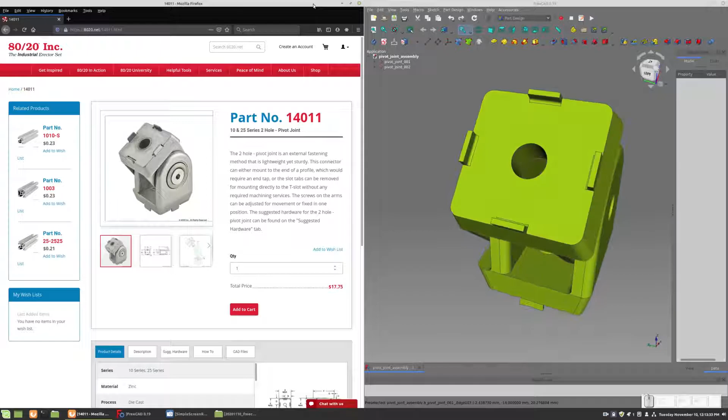Today we're going to model a pivot joint, a two-hole pivot joint. It's part number 14011 on 8020.net. We're going to model most of it. I won't model the bearings, but other than that it'll be the same. I'll put a hole in the middle where you could just put a bolt through it. So stick around and we'll get right to it.

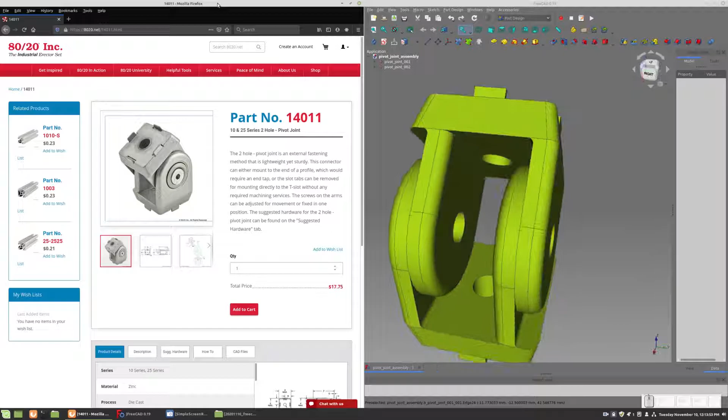Okay, before we can start modeling this pivot joint, we need to understand what it is we're modeling. If you go over to 8020.net, you'll find this blueprint for the part. The first thing I noticed is that this whole assembly is made up of two identical pieces. So we'll just be modeling the one, and then I'll show you how to use an assembly workbench to create the entire pivot joint.

The other thing to notice is that there's a lot of dimensions. If you go to the bottom of the page that has this blueprint, you'll see these dimensions listed in a table, and those will be helpful.

But one thing that's kind of jumped out at me is that there's things here that you don't really know. This blueprint doesn't tell you how tall this piece is. I'll call this the base, or the block. Just the base. It doesn't tell you the thickness of this base. It also doesn't tell you how much clearance is between the bottom of the base and the bottom of the arm - I'll call this the arm. So it doesn't tell you what this gap is.

So there are things that it doesn't tell you, and there's a lot of duplicate information too, like E and A are the same, and D and B are the same. So the blueprint might look complex or might look complete, but it really isn't.

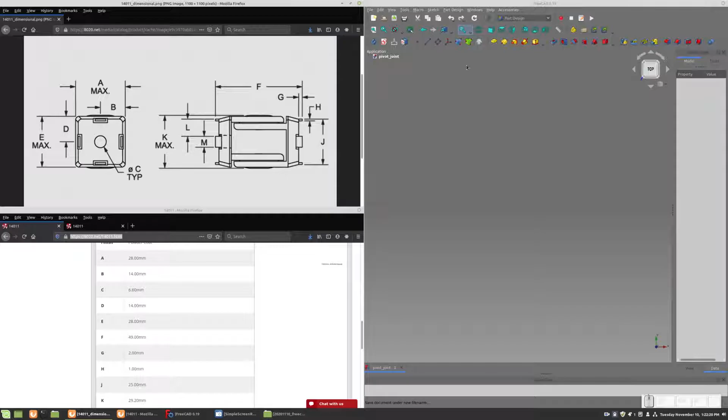Obviously this blueprint is not designed to help you design this thing from scratch to match the exact real thing. It's probably mostly there to give you a sense of whether you could actually use this pivot joint in whatever it is you're building. So we'll make some guesses and infer some values, but we'll come up with something that's pretty close to this. Go over to 8020.net, take a look at this information and the dimensions, get a good feel for what this thing looks like before you start modeling, so you can know what approach you're gonna take. With that, we'll fire up FreeCAD here and start creating this thing.

I'm going to start by modeling what I'm calling the base - that's kind of this block thing here. I'm actually going to start by creating a spreadsheet to hold all the values, just in case we want to change it later. So we go to the spreadsheet workbench and create a new spreadsheet.

And then some of the values I'm going to need: looking from the outside of the hinge, the outside of the pivot joint to the inside, there's this narrower face of the base, which I'm going to call the outer face. And then there's the wider one, which I'm going to call the inner face. So we'll call this base outer face width and base inner face width. I know I'm going to need those two things.

These also have fillets on them, so I'm going to need fillet radius. These two look the same - the fillet radius on the outer face and the fillet radius on the inner face look to be the same to me. So I'm just going to call this the base fillet radius.

Okay, so I'm just going to guess 2 millimeters. The outer face width, which is the narrower one - let's see, that's J - so that's 25 millimeters. And the inner face width is A, which is 28 millimeters. Then we need to give these some aliases, and I'm also going to add the display units in here, so these are millimeters. We'll call this the base outer face width, and then same thing on here.

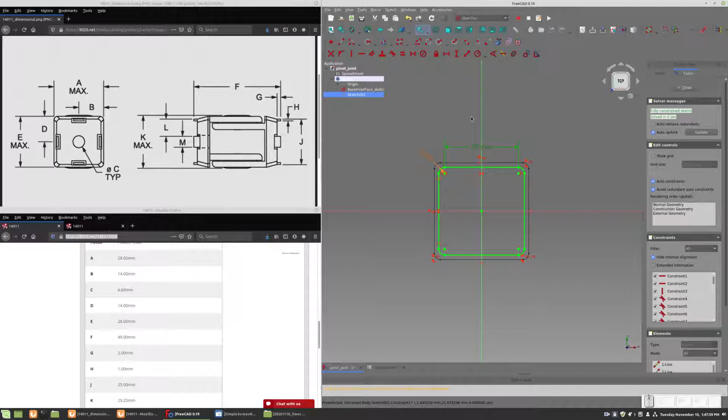Okay, so I've actually not done this quite correctly here. I've set this as 25 millimeters, but that's not correct. The width is actually of the whole thing. So let's delete that and do it here.

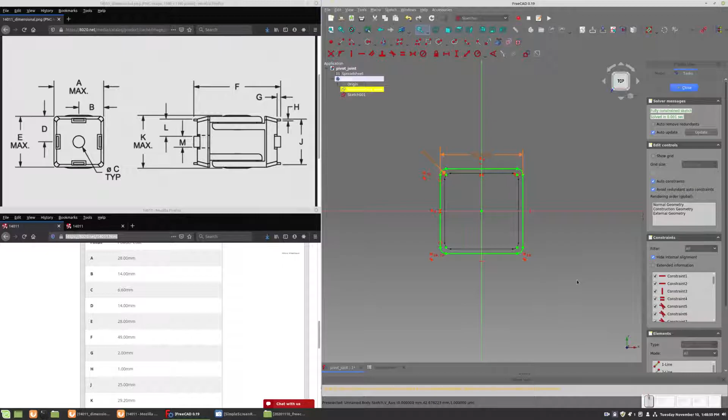And then we'll close that, and let's go back to this one because I've made the same mistake there. So let's delete that and then set the constraint on those 2 points. Okay, that's more like it. Let's rename this one. That's the base outer face sketch.

And then we need to move this up. What we're going for here is we're going to extrude from one sketch to the other. So we need to move this outer face out a little bit, or up a little bit. So I believe that's in the attachment. Yeah, attachment. All right, so I need to move that in the Z direction, the Z axis. But I don't know how much.

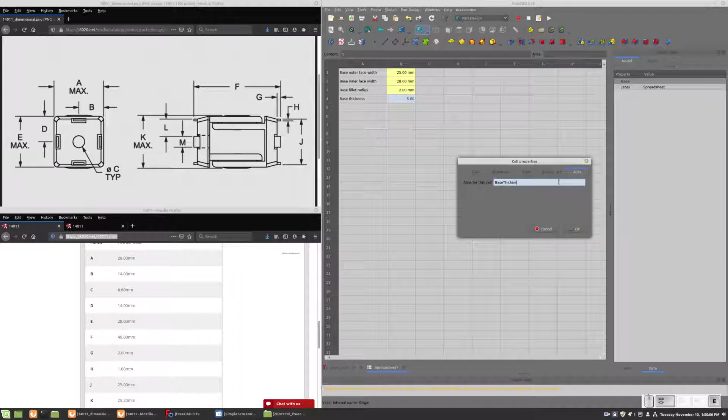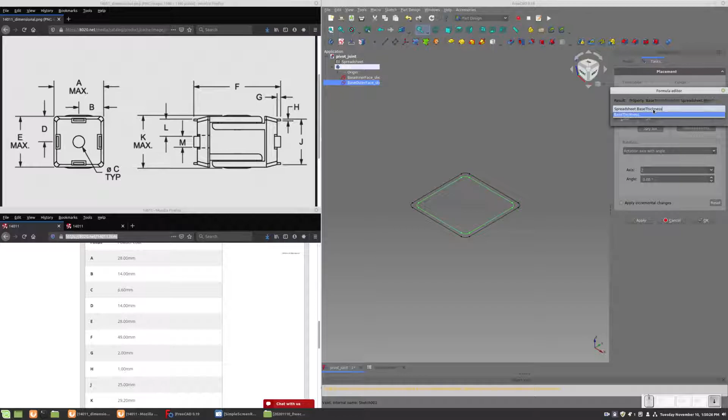Remember I said how this thickness is not defined. So I'm going to add an entry to the spreadsheet. I'll just call it base thickness. And I'm just going to make a guess for now, and then we can come back and revisit it. Okay, that seems reasonable for now.

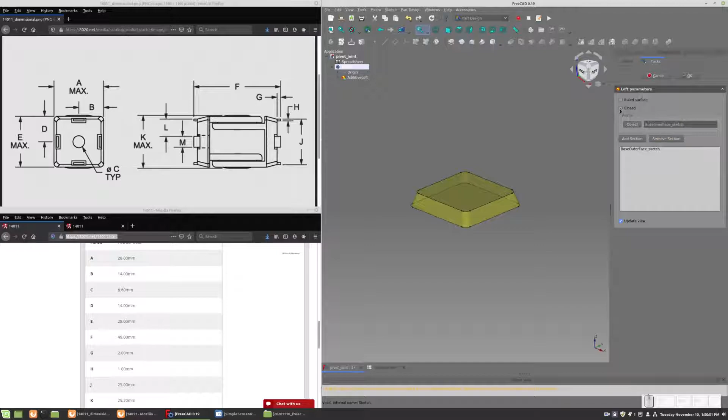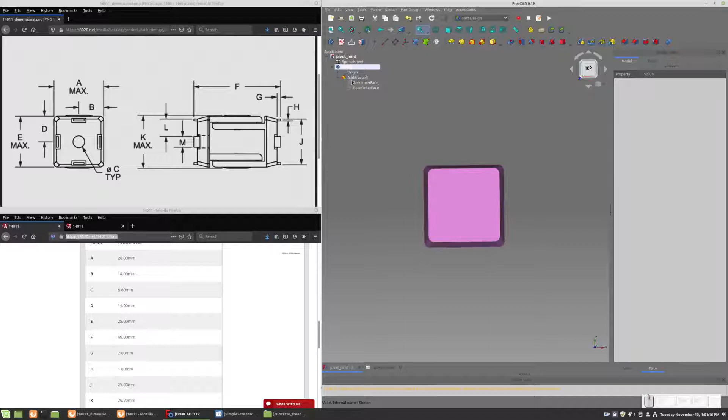Okay, and then the last thing we want to do here is extrude this, or sorry, loft it. I believe that's what we want. Yes. So let's loft that. And that seems good. All right, and there we go. Might be a little on the thin side, but we'll make adjustments later. But as you can see, we have basically our base, and that looks just kind of like the blueprint there. So let's save it. I like to save a lot, and let's rename this to base.

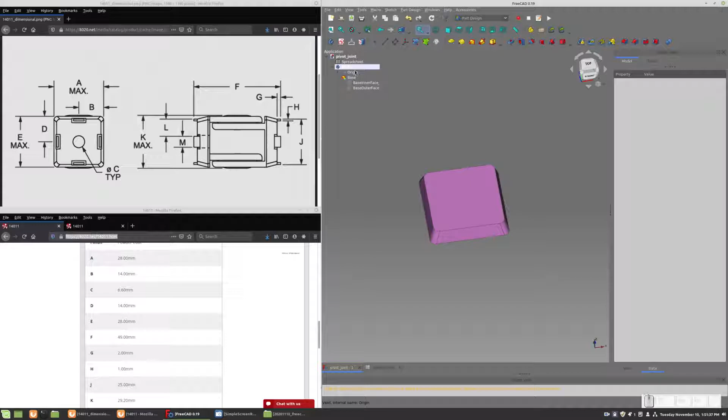Okay, and then the last thing I'm going to do here is change the color of this because bright pink is not working for me. So let's change the appearance. I'll change the color to, say, gold. How about gold? That works a little better. And then I like to look at it from perspective view. Okay, so there's the base. Next we will work on these little tabs that kind of poke out from the top of the base. So we'll do that next.

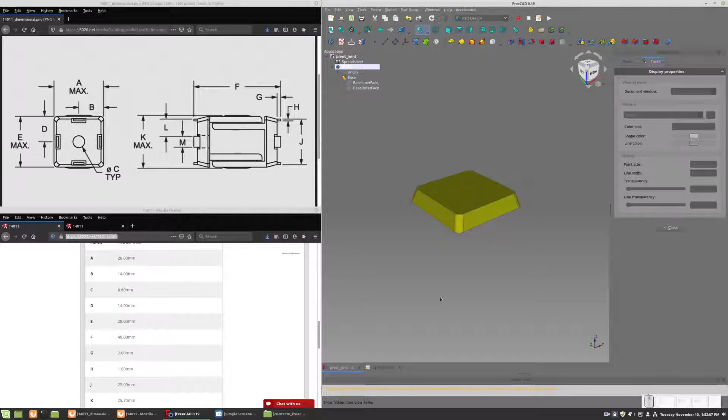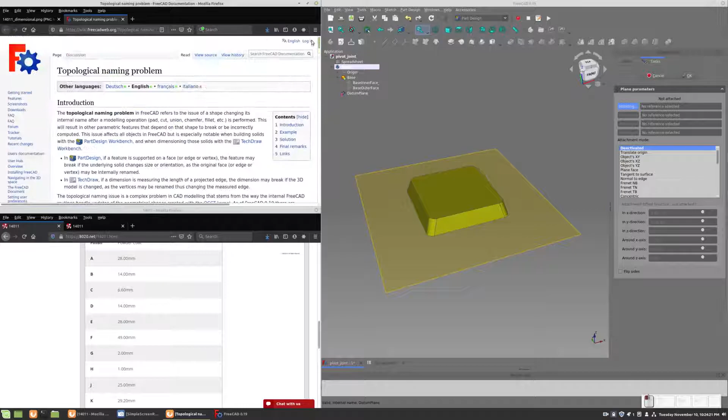Okay, so we have the start of our base. I'm going to add some tabs and a hole to this. So to do that, I'm going to draw on a datum plane. You should probably look up something called the topological naming problem, and I'll link to it in the description below. I just heard about this, so the recommendation I've seen is to draw on datum planes instead of directly on surfaces of other objects, so that if you change those objects, it won't break the internal names of the objects that depend on it.

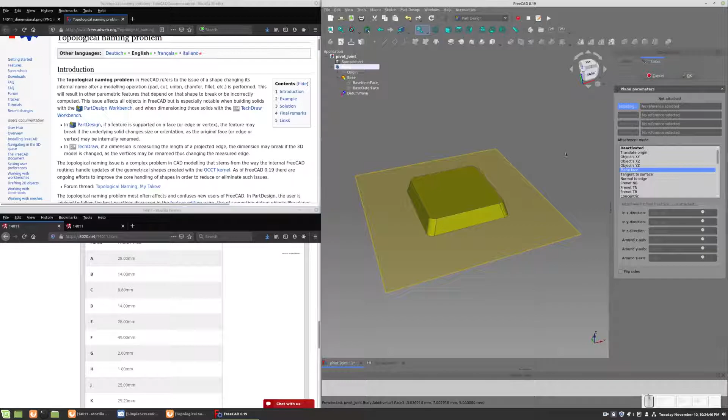So I'll create a datum plane, and I'll put it on, I believe, the plane face, and then if you look, it's too low. I want it actually at the surface, at the top of the, what are we calling it? We're calling that the outer face. So I'll just change the placement, I believe. Yeah, so I'm gonna make that the thickness of the base. So we'll just do spreadsheet dot base thickness.

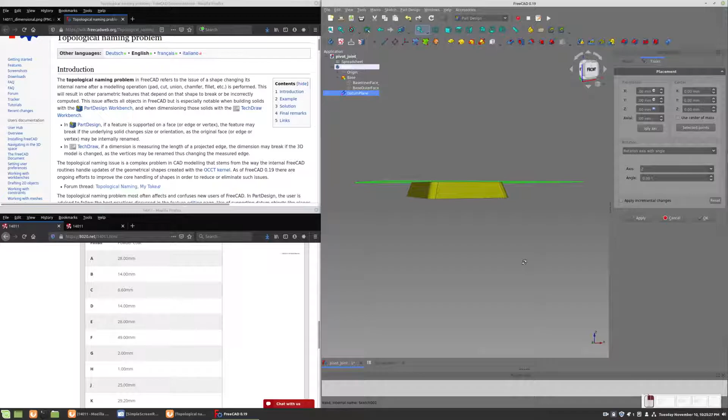And now we can see we have a plane that no matter what the thickness is, the plane will always be at the top of the base. So we'll go OK. And then on that datum plane, I will create a sketch. So let's do the hole. So we'll just do a circle centered at the origin.

In my spreadsheet, I've added this base hole diameter, and that is based on value C in the blueprint, and that's 6.6 millimeters. So I'm going to constrain the diameter to that value. Okay, so close that, and then we will pocket that.

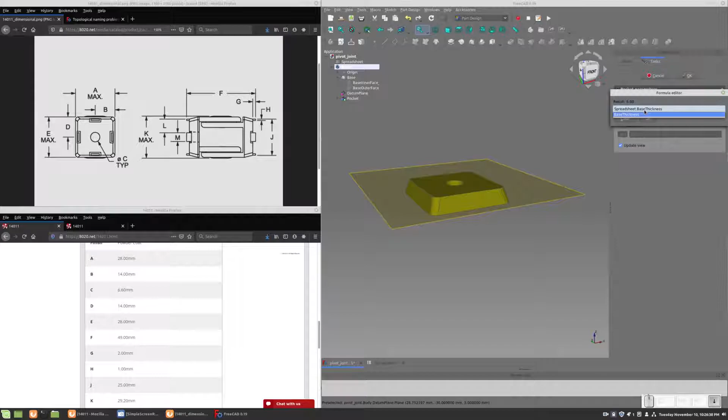And let's try doing this based on the thickness of the, we could do through all, but I want to try doing this on the spreadsheet base thickness. And we'll see if that actually, yeah, that does give us a hole through everything. So we'll do that. Let's name some things here.

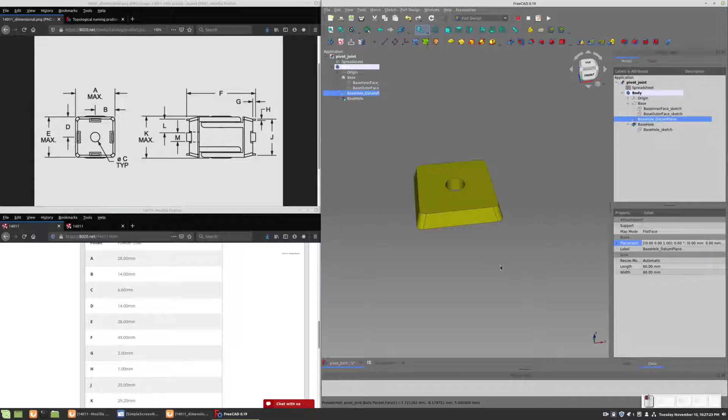So this is the base hole datum plane. And then this is the base hole sketch. And the base hole pocket. Actually, just the base hole. We'll just call that the base hole. All right, so next, let's hide this datum plane just so we don't have to look at it.

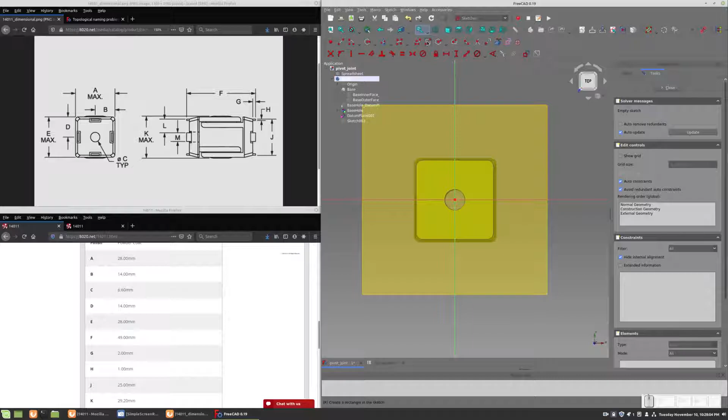And then I want to create another sketch for the tabs. So we'll create a new datum plane for that. We'll put it on the flat face. And then same as the previous one, we'll place that above in the z-axis direction the thickness of the base. And we'll draw a sketch. Alright, so these tabs, they're basically just little rectangles. So I'll just draw a little rectangle there.

Now, let's see, we want this kind of on the edge. So first let's make it symmetric about this axis. And get rid of the vertical constraint. Okay, now let's put this on the edge by doing a horizontal distance constraint. And that's based on the spreadsheet. This is the outer face width divided by 2. And that should put that on the edge.

That's good. Now we want to add some things for the tabs in our spreadsheet. So let's see, tab height. Tab height on our drawing is this. It's G. Down here it says 2 millimeters. So we'll go 2 millimeters.

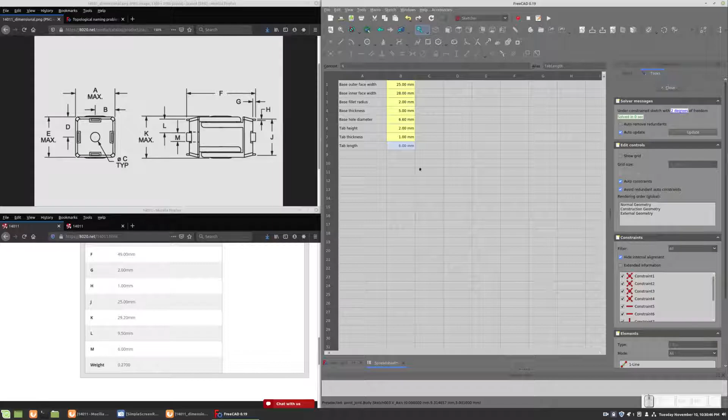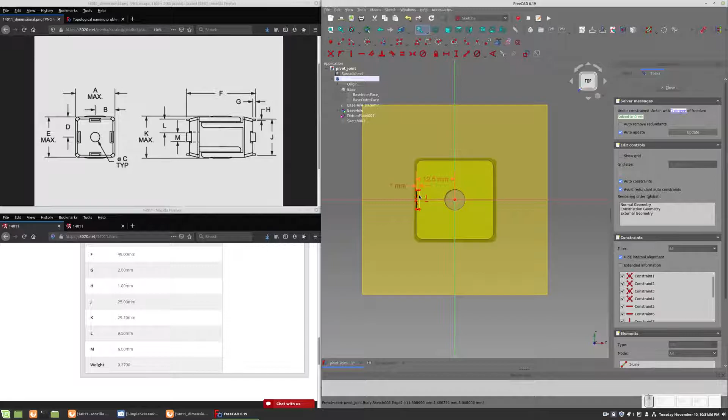And with those things, we should be able to size this properly. So this one is the tab thickness. Okay, 1 millimeter. And this one is the tab length. So we'll do vertical constraint. Okay, and our sketch is fully constrained.

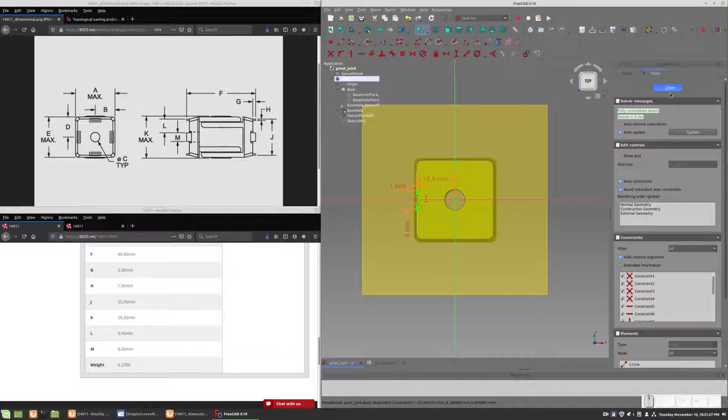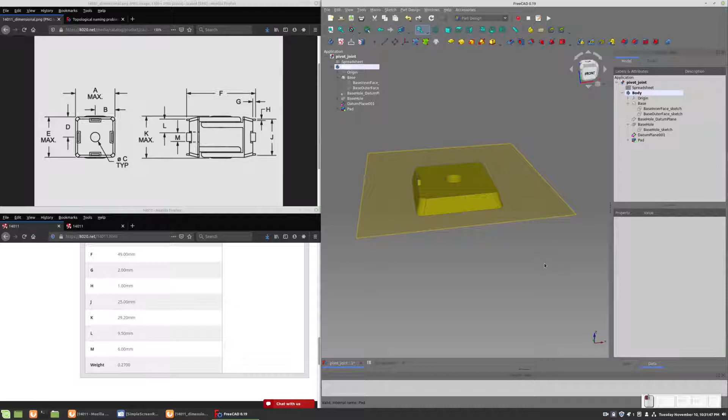So now we can close this, and we want to pad it. And we want to pad it the tab thickness from our spreadsheet. Sorry, not the thickness, the tab height. That's what we want. Okay, let's hide this datum plane. So we've got a tab here, so that looks good. Let's rename these things just so we don't get out of control here. I did not mean to do that.

Okay, so that's the tab datum plane. And that is the tab sketch. And that is the tab. Okay, the next thing we want to do is replicate this. We want 4 of these. So I am going to do a polar pattern for the tab. And 360 degrees, we want 4 of them.

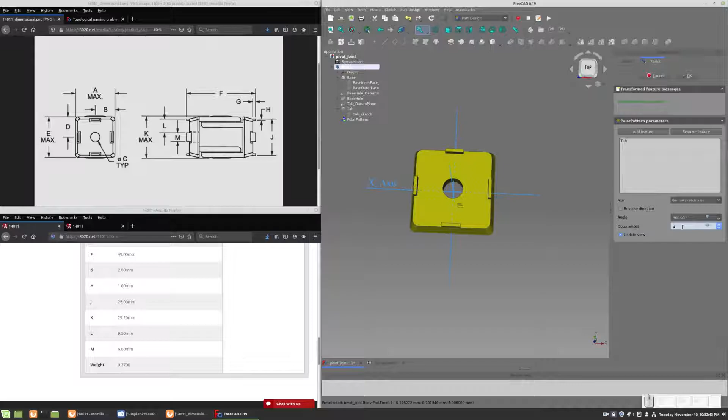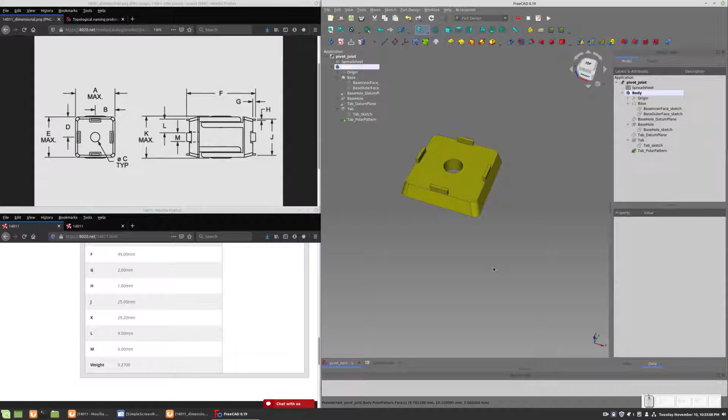All right, so that looks good. Just rename that. The tab polar pattern. And we'll save it. Okay, so we've done our base. This video is getting kind of long, so I think I'm going to split this up into multiple parts. This is part 1. In part 2, I'll start working on the arms to create these 2 arms that have the hole through it for the bolt.